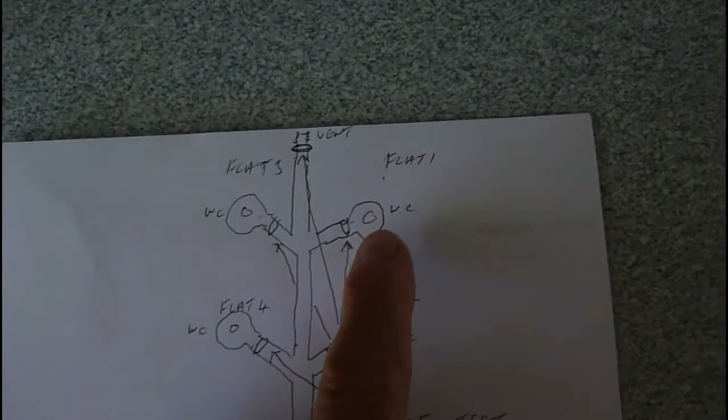These days, when you get, say 4 or 5, 6 flats or whatever, you find that the drains have to be pressure tested. Okay, this is where the bung comes in. I'm going to show you on this drawing. Now we're saying there that there's our flats. We've got flat 1, 2, 3 and 4. I've just labelled them across, and quite often the soil stack will come up in the drain and go in each flat. Okay, to the toilet pan, we'll say there's a toilet pan on each flat.

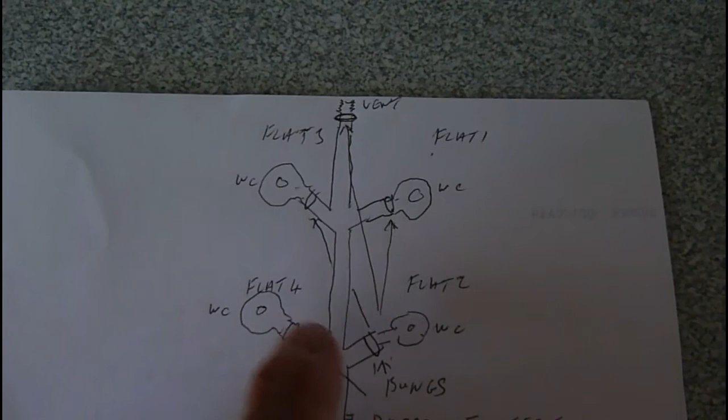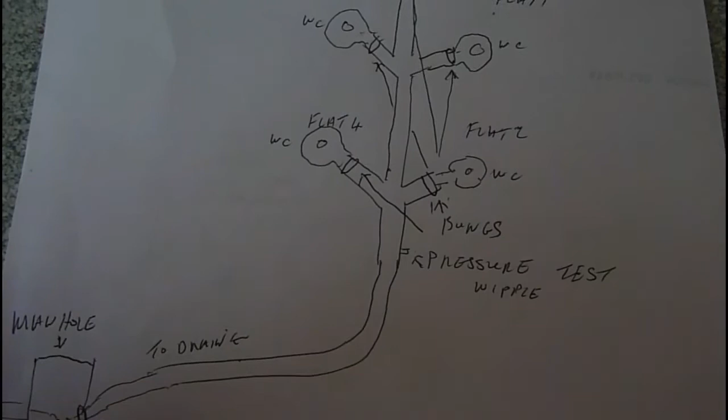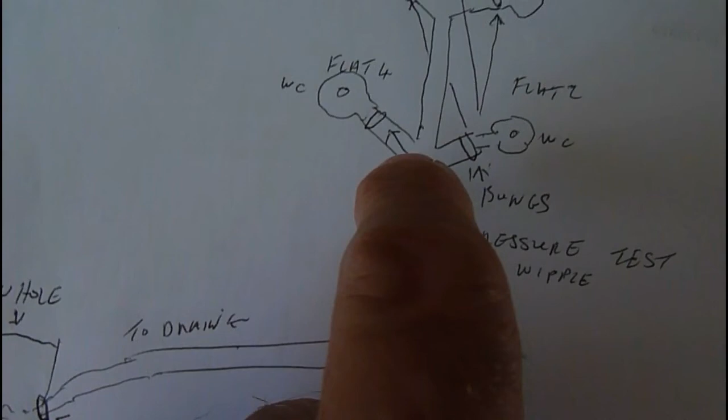Now obviously they're all connected, and what's got to happen before they are actually used is that they get pressure tested. So there'd be a pressure test nipple inserted in the pipe, and then we get our bungs. Now the sort of bungs you see in soil pipes are usually 4-inch expanding rubber, and you usually have a big wing nut that tightens the rubber out and pushes it outwards against the pipe, so it would be there and it would expand out. Now obviously I haven't put all the joints down, but there would be loads of joints on these pipes, the T pieces, and all those joints have got to be pressure tested.

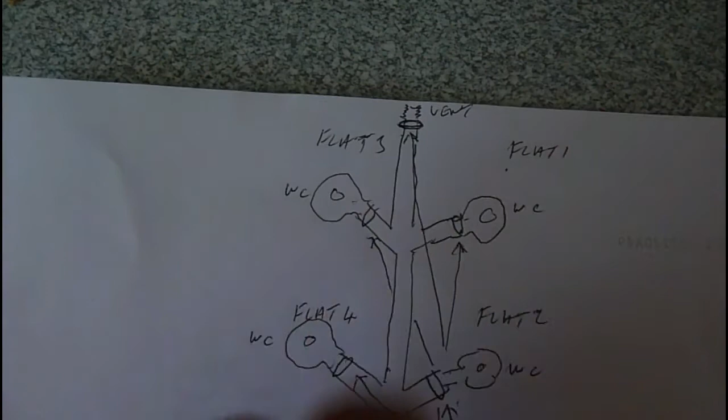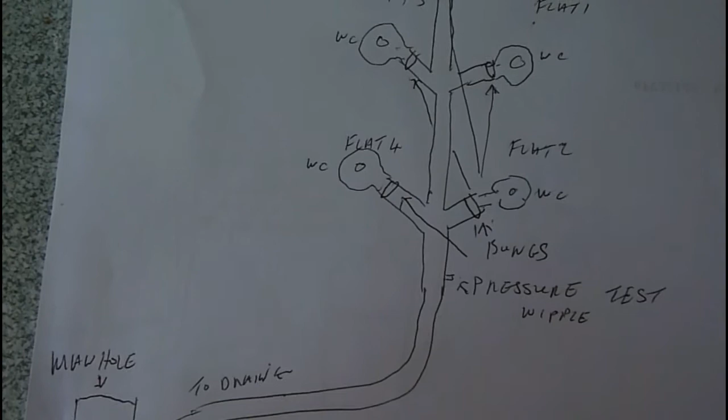So what we'd do, we'd put the bungs there, there, there and there before each pan goes in. One at the top of the stack, and probably one right down at the drain end if you can get down there. And then this thing would be pressure tested, and if there's any leaks, of course, they would show up immediately with air. And that's one of the main uses of rubber bungs in plumbing, usually for soil stack testing and making sure the drains are tight, airtight, and there's no leaks. Then after that the system's fine. A lot of times that is demanded now before the drains are released. Okay, that's one of the primary uses.

There are some more. Now if you take a look at this drawing here, the second use is for a roof tank. What can happen, you go to a house to do a tap or a leak or something, and quite often you'll find the feed from the roof tank that goes down to the cold feed in the bathroom, which will do the basin and the cistern and the bath tap, will have no gate valve. They'll have forgotten to put it on, not even up by the tank, and there won't be anything if it comes down by the airing cupboard, which it generally is.

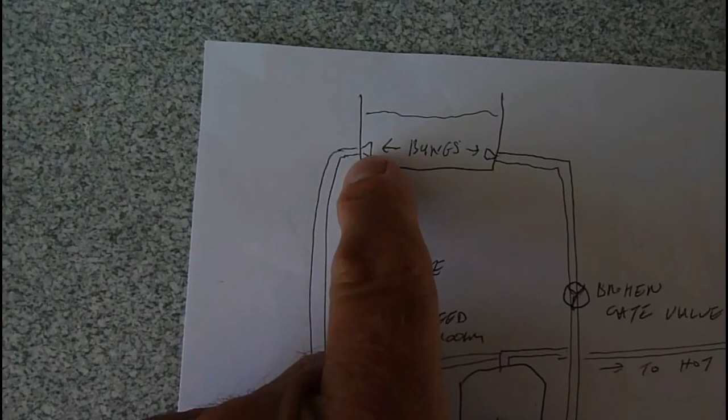So you've either got to drain all that tank down, which is quite a waste of water, or the other thing to do is to go up there and put a bung in the feed pipe. Put it in there, and then you can work on it, because the other thing that often happens is that a gate valve going down to a hot water cylinder is quite often broken or not working, and you may need to renew that gate valve because it isn't working.

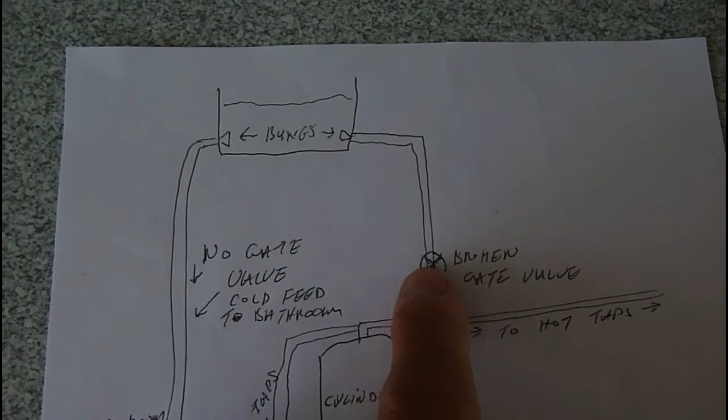Again, to make life easier, rather than drain all this tank down, just go up there with your rubber bung and stick it in the pipe. Stick it straight in the hole, and then you can work on it, renew the gate valve, and the job's done. So that leaves us, what else?

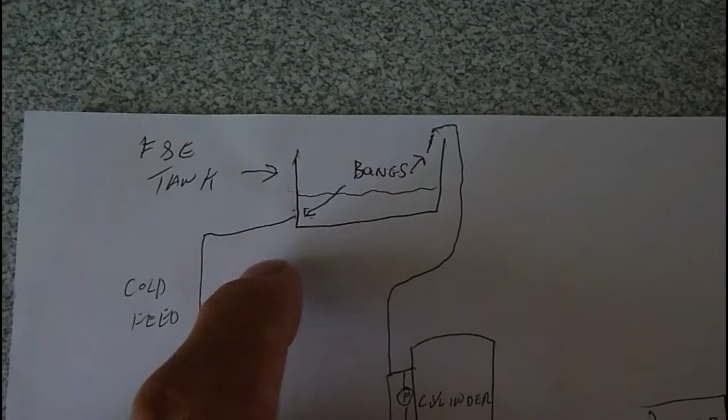One of the other prime things: you can get a little set of bungs that used to come on a piece of string. I think they're still available, and they were custom made to fit in an F&E tank. This is the little tank that would supply your boiler and central heating, because it's another really handy device to have. It's obviously no good for combi systems.

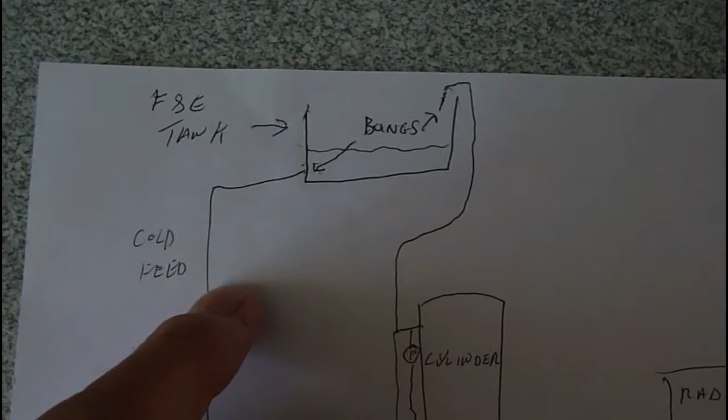What we're talking about is a heating system with just a little F&E tank up in the loft, and you get a bung that would go in the cold feed, and one that would fit in the expansion. And of course what that did effectively, rather than shutting it off here if there was a gate valve here, was lock the system up.

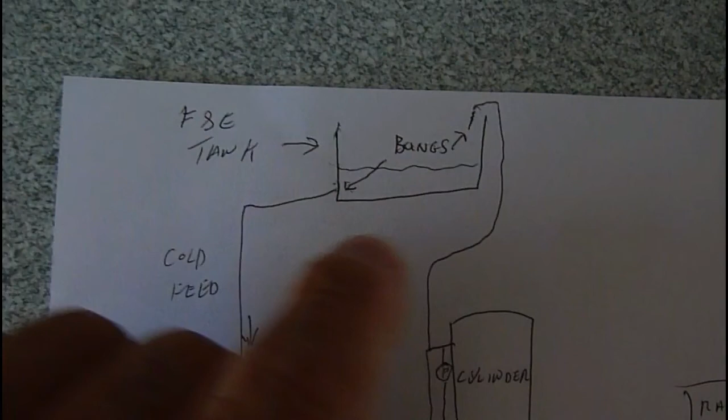It's a little bit like holding your thumb over a straw. The water won't come out because no air is allowed in. Once you've got your thumb on the end of a straw, you could have water in it and it won't go until you release your thumb. The water will come out. Well, that's a bit like this. By bunging up the vent and the cold feed, you've effectively sealed the system off.

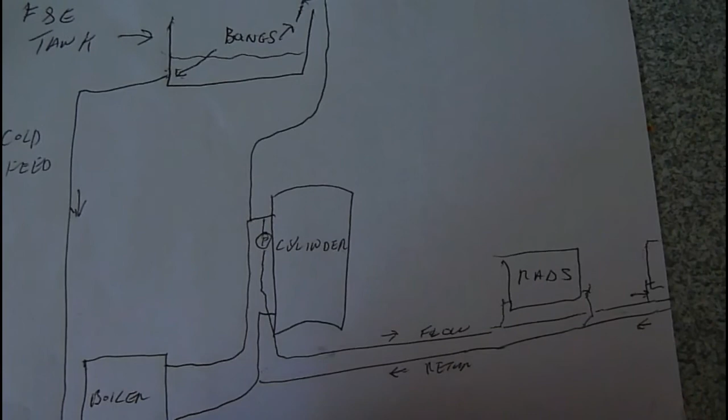So what it means is you probably can work on a radiator or on the line somewhere with very little water on the job. It will only be a little bit that's actually in the pipe. So effectively you haven't got to drain it, which is the idea. You don't have to drain it all out. You could work on it with just a tiny bit of water that's dead in the pipe. So that was a very good use.

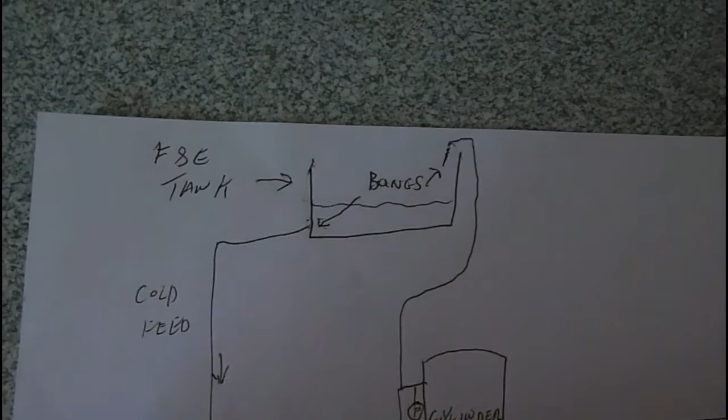You can still get these, I believe. They were available from plumbers' merchants, and they come on a piece of string with the right size bung to go in there and in the vent. Little 15mm bungs they were. There was a proper name for them, I can't think now, but I think you can still get them. Okay, so that's one of the main uses really. I think the main use is the drains, and this one for the broken gate valves, to be honest.

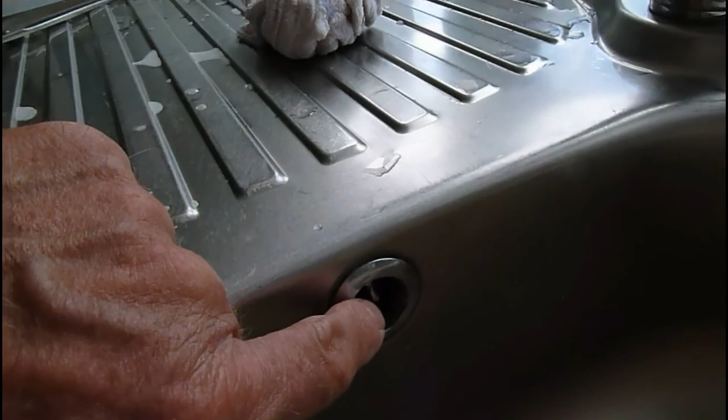There is a very last use. If you use a pressure gun, like I do on a sink, if you get a block, you'll find that the overflow always belts out of there if you try to blow it without putting your hand over there or something. So I'll make a bung up again and put it over there. I use a bung of plumber's mate actually. I put it over there, then I blow the waste with a pressure gun, and that clears it.

So that's probably the main uses of bungs in plumbing. So they are handy, and you can make them up. I've even tried corks out of bottles and just shoved them in the pipe, and they work as long as you don't push them in too far and get them stuck down the pipe, whatever you do. But a proper rubber bung makes a good job. It saves you a lot of time and a lot of effort, especially when you've got those type of plumbing problems.